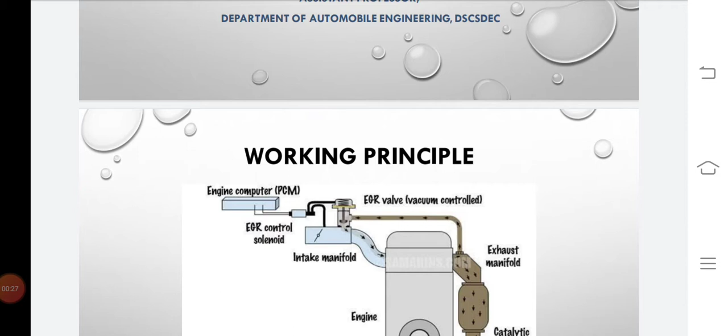Today I am going to discuss the topic of exhaust gas recirculation, or EGR. Exhaust gas means the gas emitted from the engine after the burning of the air-fuel mixture. We use the exhaust gases - not 100%, but a certain portion of exhaust gases.

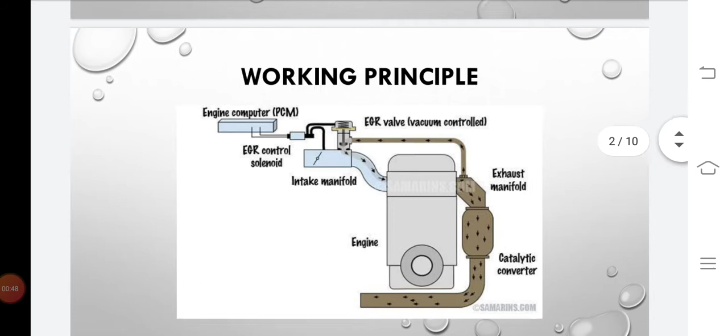So what is the basic fundamental of this exhaust gas recirculation process? In previous classes I discussed the relation between temperature and different kinds of pollutant generation. With increasing temperature, hydrocarbon and carbon monoxide will be reduced, but if we increase the exhaust gas temperature, NOx emission will increase significantly. So we have to keep our exhaust gas temperature within a certain limit, not exceeding too much or too lean.

So we have to think about this matter - we have to maintain a significant temperature so that not too much NOx is generated, and not too much CO and hydrocarbon is generated. So our main motto is to drop the peak combustion temperature.

If you remember the entropy and temperature diagram, T3, the temperature after combustion, will be the maximum in the TS diagram, not PV but TS diagram. That maximum temperature is the peak combustion temperature. This peak combustion temperature has to be reduced, and if we reduce it, we can control NOx emissions significantly. So what are the processes to reduce the peak combustion temperature?

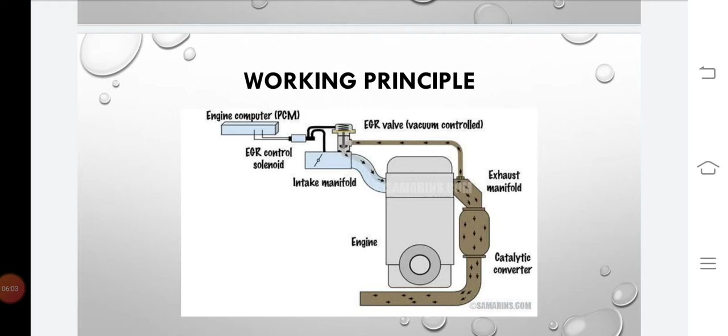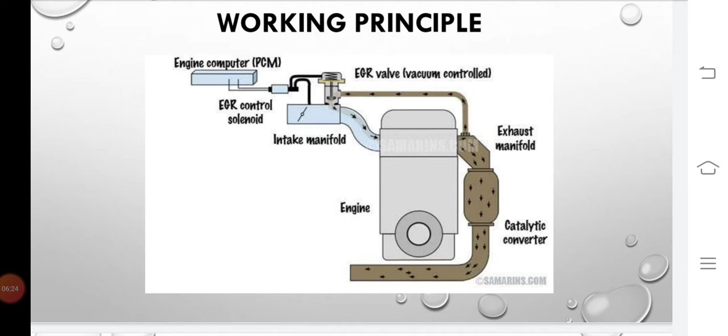So we send this exhaust gas through an intercooler, because exhaust gas has a high temperature of about 200 degrees centigrade. From that intercooler, the exhaust gases come back to the engine cylinder or engine intake system. This certain portion of exhaust gases goes to the inlet manifold through the EGR valve. So this is the basic fundamental diagram of an EGR system, or its working principle.

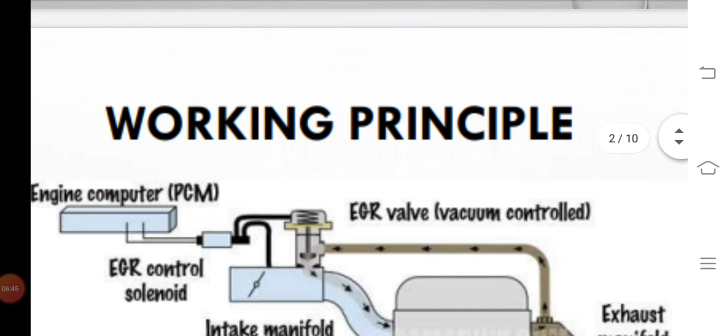Here you can see there is a valve - this is the main component of an EGR system, called the EGR valve, which is basically a poppet type, spring loaded, vacuum operated valve. We will come to this topic of EGR valves later. Now, what is an EGR valve? The EGR valve was introduced in 1972, and as I told earlier, it is a spring loaded, vacuum operated, poppet type valve.

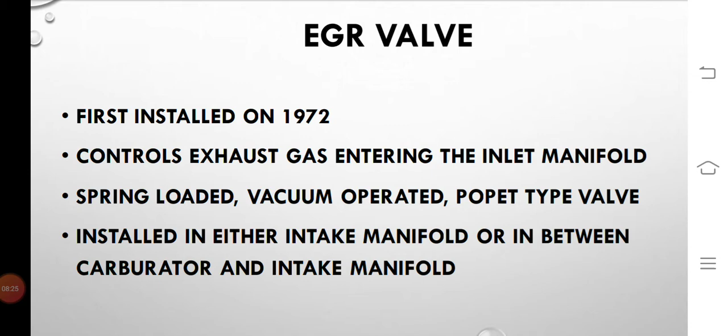It controls the amount of gas that enters the inlet manifold - what amount of exhaust gas is sent to the inlet manifold. That is the main motto or purpose of the EGR valve. The EGR valve can be installed either in the intake manifold or between the carburetor and intake manifold - it can be installed in this process.

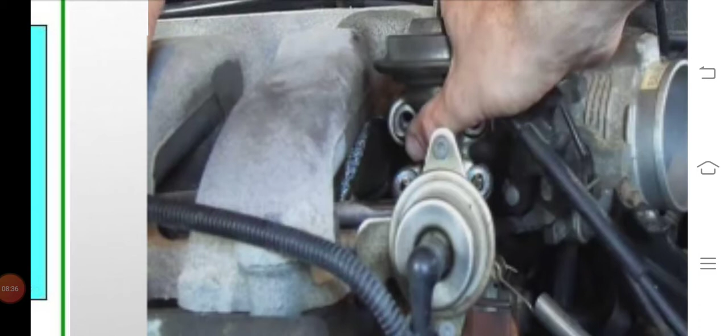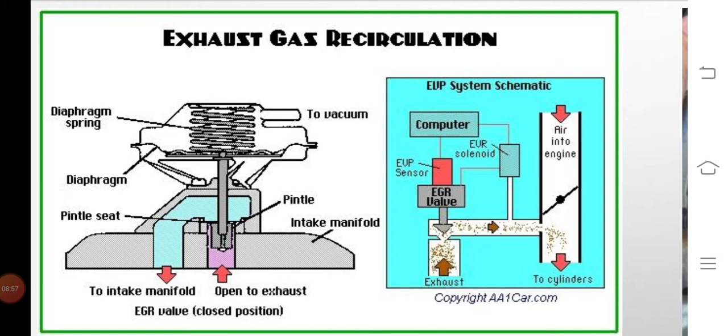This is the real picture of an EGR valve. You must see this in a BS4 vehicle - if there is any EGR system available. In BS6, EGR is mandatory, both EGR and SCR are mandatory. So this is the EGR valve - this is the diaphragm, this is the spring loaded valve, and this is the vacuum side.

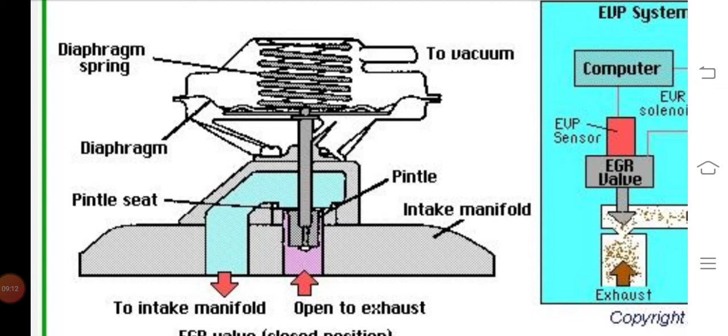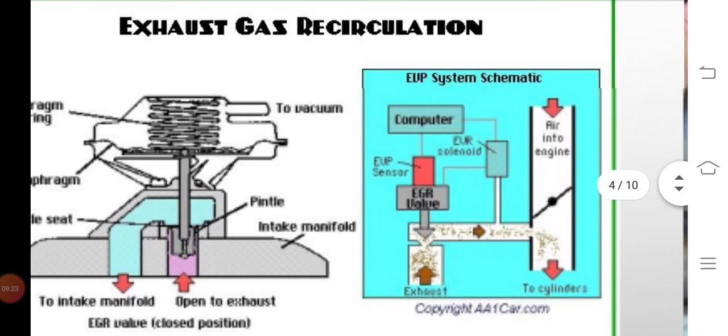This is the diaphragm - here you can see the diaphragm. This portion is open to exhaust, and this portion is open to the intake manifold. So these are the diagrams of the exhaust gas recirculation valve, and this is the process.

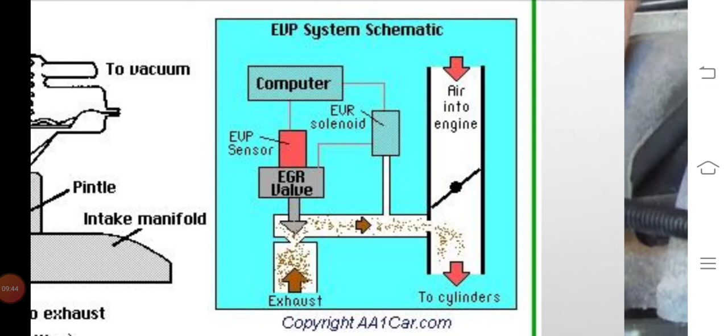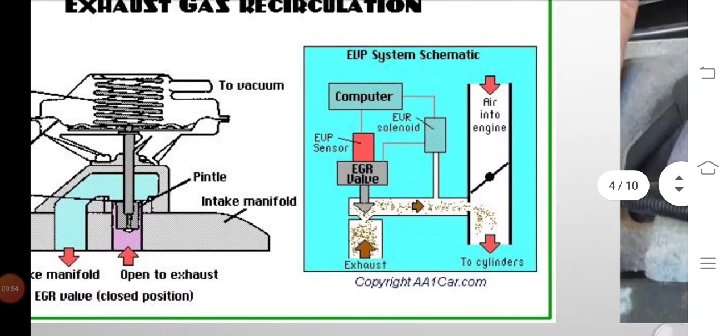Once again, this is the process: exhaust gas comes to the engine's intake cylinder by opening the EGR valve, and this EGR valve is controlled by the ECU and some different kinds of sensors. It is totally vacuum operated, spring loaded, and a poppet type valve. So these are the EGR valves.

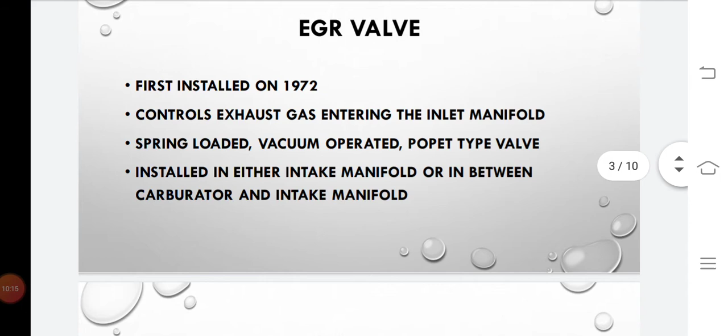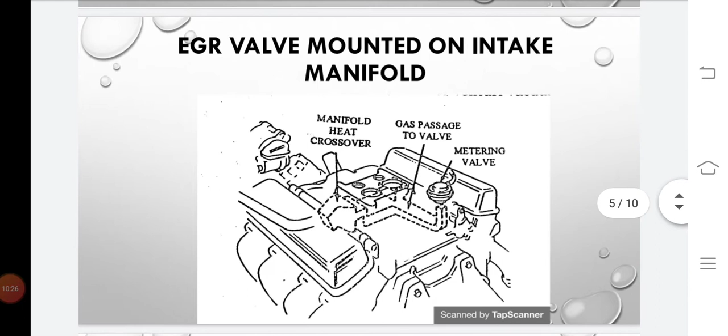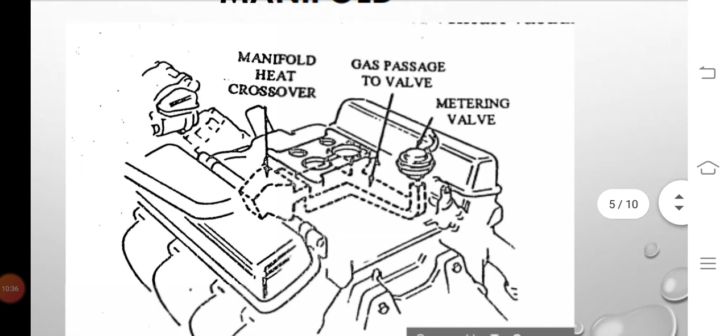Now coming to the next slide, EGR valves mounted on the intake manifold. As I told you earlier, there are two types installed: either in the intake manifold or in between the carburetor and intake manifold. So it is on the intake manifold. You can see, on the right side, the metering valve. This is the EGR valve, and after the EGR valve you can see the air intake system also. So it is installed, this EGR valve is mounted on the intake manifold.

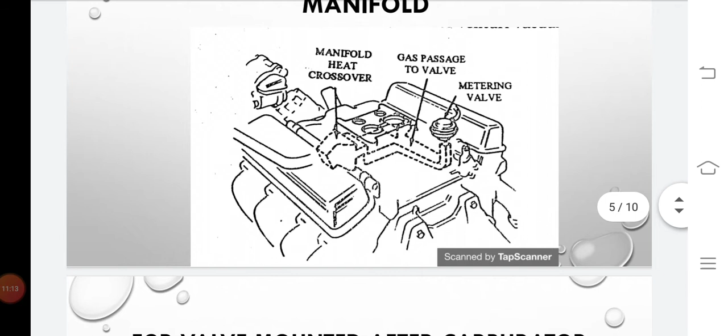This is mounted on intake manifold. Now this EGR valve is mounted after the carburetor. This is the EGR valve and this is carburetor spacer, and this EGR valve is installed. First the carburetor, then the EGR valve is installed.

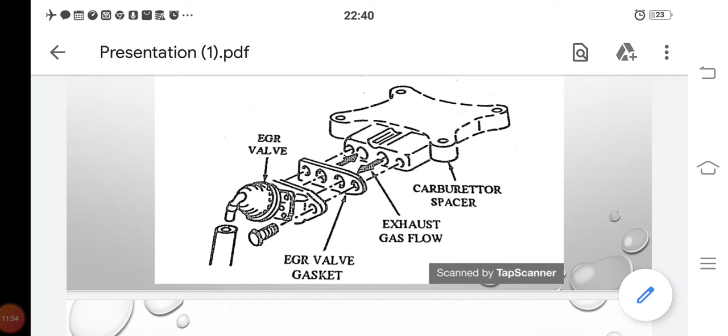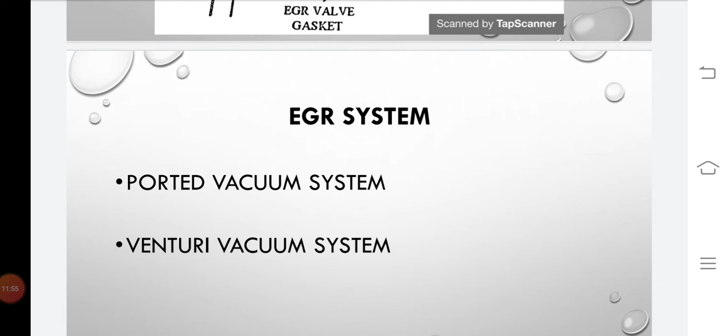Now, EGR system. The EGR system is also classified into two types. One is ported vacuum system, another is Venturi vacuum system. So the EGR system can be classified as two types: one is ported vacuum type system, another is Venturi vacuum type system.

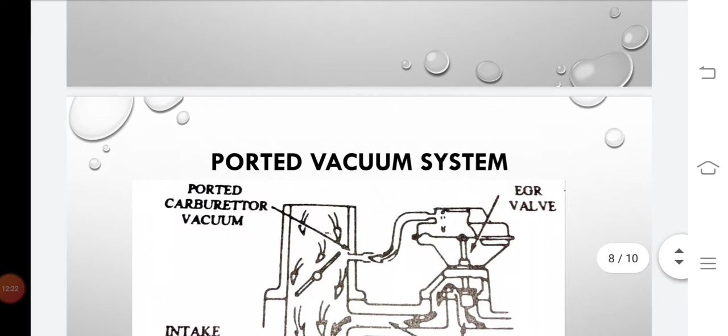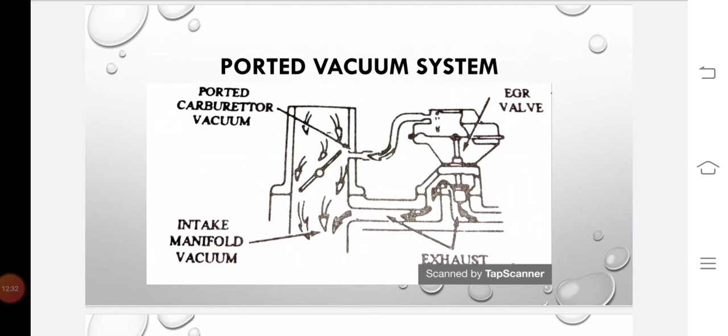This is the diagram of the ported vacuum type system. Here you can see the EGR valve is set on this, and this is the exhaust lining, and this is the carburetor. On the left side you can see the carburetor in the inlet manifold, and due to this inlet vacuum, the creation of this vacuum, the EGR valve is opened and the exhaust gases enter the intake manifold. So this is the ported vacuum system.

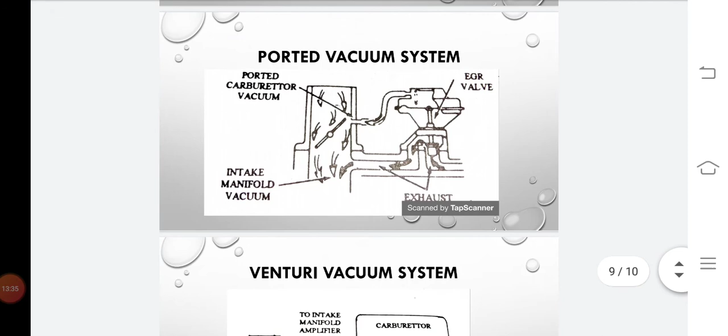Now this is the Venturi vacuum system. You can see here there is the carburetor, and this is the intake, and there is the EGR or exhaust gas recirculation valve, and in between the carburetor and EGR there is also an amplifier. What is the amplifier? Why is the amplifier used here? Because the amplifier can amplify, and it also helps to open the EGR valve, because mainly this amplifier is controlling the EGR valve's open and close. So this EGR valve can be operated in this type by the amplifier.

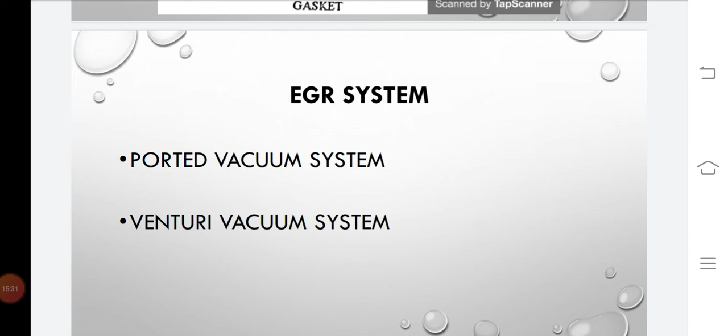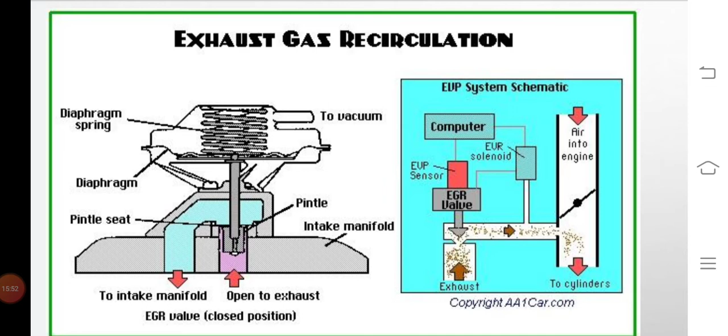So these are the types: the ported vacuum system and Venturi vacuum system. These are the two types of EGR valves and EGR systems. Another type of EGR valve, here you can see a single diaphragm EGR valve, so another type of EGR valve is the dual diaphragm. That kind of valve can use the dual diaphragm or two diaphragms.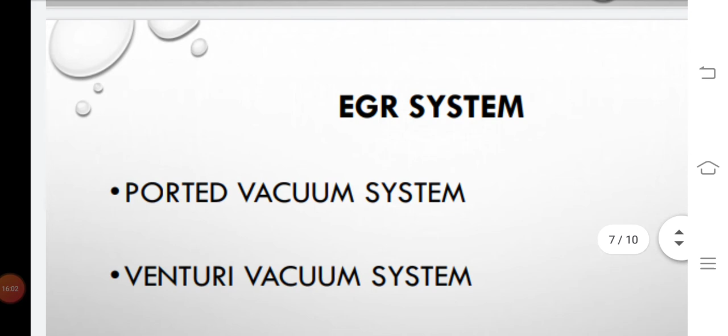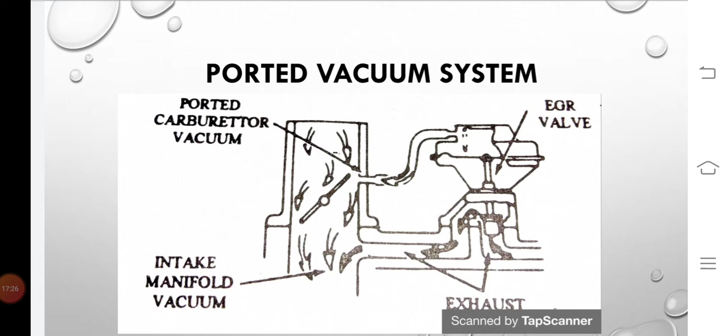And in the Venturi vacuum system, this vacuum control is not so important, and vacuum control is very less efficient in that case. So the amplifier, as I told you earlier, is used to boost and operate the EGR valves, and the exhaust gas flow depends mainly on the engine intake flow also. It is also affected by the intake vacuum and exhaust back pressure also.

And a relief valve or dump diaphragm compares Venturi and manifold vacuum, and prevents recirculation of exhaust gas at wide open throttle. When the diaphragm senses the throttle at wide open, the stored vacuum in the amplifier is released to the atmosphere, and this prevents the manifold vacuum from reaching the EGR valve also. And since the EGR valve opens at a point greater than the relatively weak manifold vacuum, the valve remains closed at wide open throttle. So these are the processes of the Venturi vacuum system.

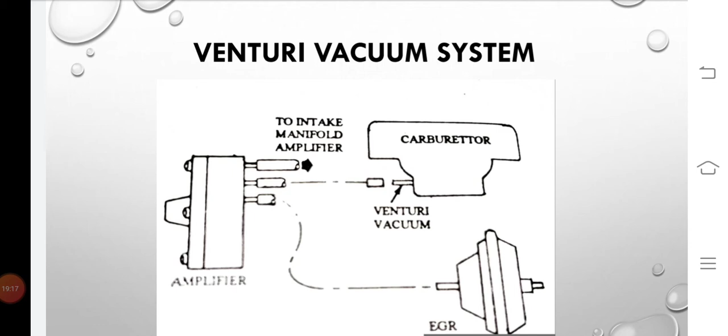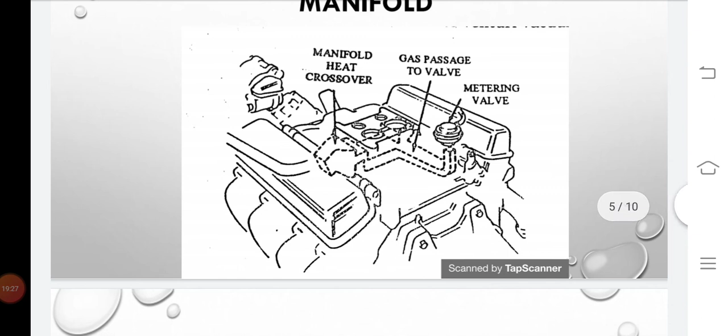And these are the valve locations. As I told you earlier, these two locations: one is EGR valve mounted on the intake manifold, and this type of EGR valve in some cases uses an external steel tubing pipe also. And a spring holds the EGR valve. The main component is a spring, that spring holds the EGR valve in the closed position, and the valve is opened by the port or Venturi vacuum from the carburetor.

A small amount, the temperature below 1645 degree Kelvin — below that temperature the NOx emission is very, very low. So we have to control this combustion process around 1645 Kelvin; it is the crucial temperature point for NOx generation. So we are sending the exhaust gases again into the intake manifold, so that we are using such an amount of volume which cannot take place in the combustion. So what will happen? The efficiency will be dropped, and peak combustion temperature is also dropped. So an EGR setup engine always performs lower than a non-EGR type of engine.

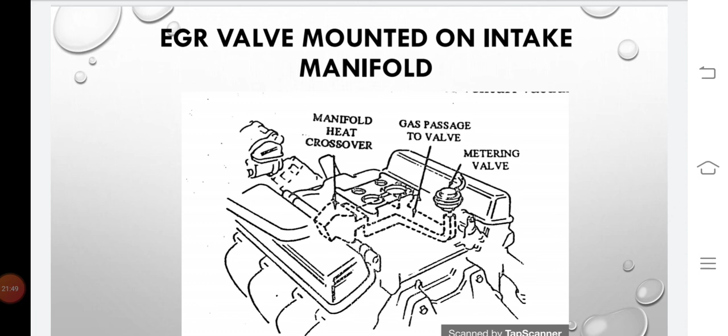Okay, so this is today's topic. This is exhaust gas recirculation. Okay, thank you.